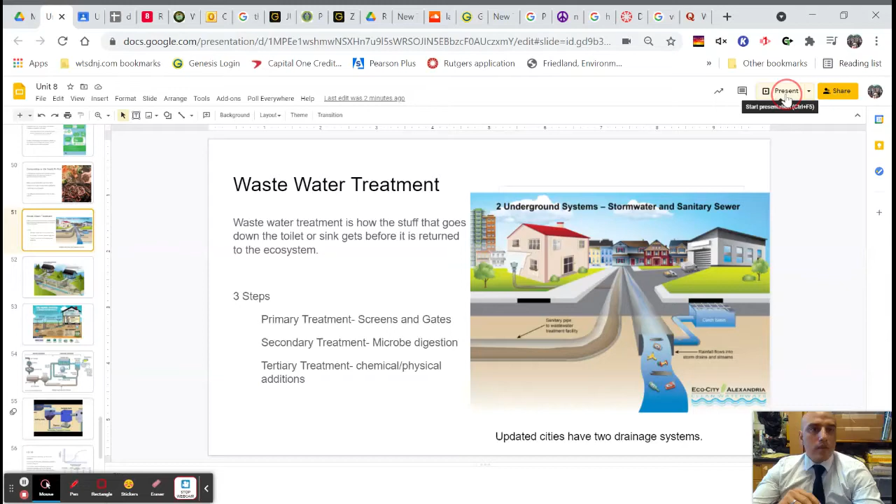Today we're going to learn all about wastewater treatment. Wastewater treatment describes how the water we throw down the toilet or the sink basically gets treated before it's released back into the ecosystem. When you do number one or number two, it is going to be released out into the wild. What happens? How is it treated? That's what we're going to learn today.

But before we even go into that, I want you to know how the sewer system works in a community and typically around different areas.

In cities, developed cities, everybody is connected. Let's look at these homes in this image. There's going to be one main drain that comes out of your house, and the sink, the bathrooms, the toilets all join to one pipe, which feeds into the sewer in front of your house or apartment building. The next house or apartment building also has a main pipe, and all of these feed into the sewer.

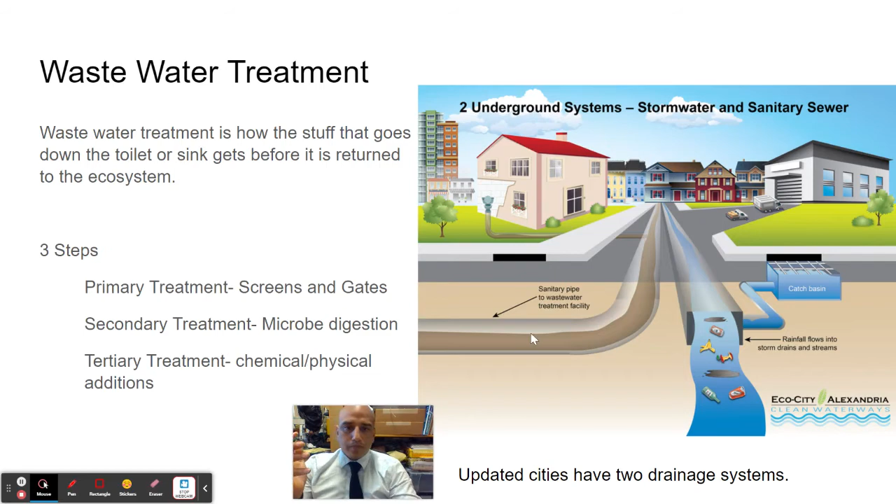Let me go back. I put those two slides in there basically to show you that the houses are connected. Here's the sewer, here's a storm drain.

One time in Jersey City, I'll tell you the story. I don't know, I might have even told you the story before, but I'm going to repeat it.

Imagine there was no other sewage pipe here, rather it was just the one pipe. And I lived on the bottom of a hill. So here is...

I'm young, we didn't have homes growing up, we lived in apartments. So this wasn't something that was taught to me. We did not know. We bought the first house we could afford, so we were able to buy it.

But if I had to do it over again, this is one of those gems I'm giving you. Please pay attention to these. You want to know where the house you're buying is located. Is it at the bottom of a hill?

If it's at the bottom of a hill, then all the rain, all the snow, all the leaves are going to pretty much stay right in front of your house. The topography, the pitch of the ground you live on, does it have great drainage of the street?

Think about that. When people mow their lawns and blow the grass clippings into the street, where do you think they end up? They're going to go downhill. If your house is down there, you might have to deal with that. If you have proper drainage, you'll be okay, but it's just something you have to deal with.

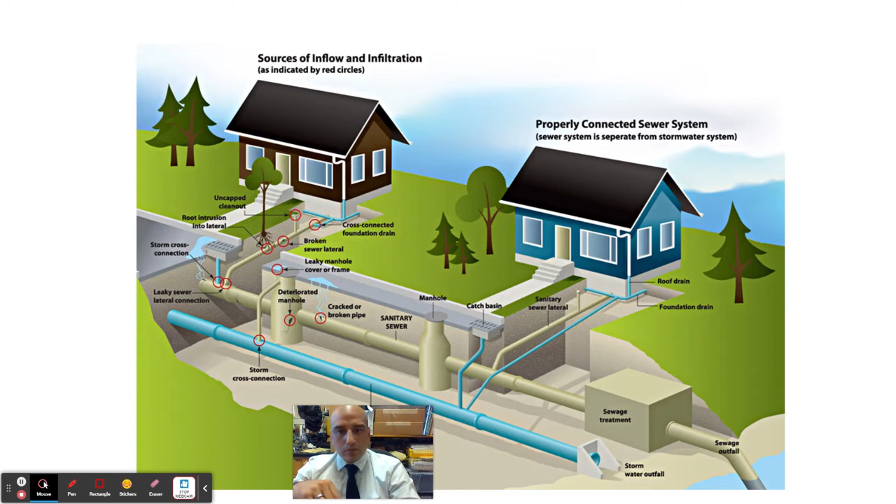Know where you live. Here's another picture — a bathroom upstairs connected to the same drainage pipe. This is that backwater prevention device we did not have in that house at the time. Water can go this way, but it cannot go back up.

Now, important — when you're at your toilet, what do you not want to drop down there? You don't want to drop motor oil, antifreeze, pesticides, or fertilizers in there. They should not go in there. There are microbes back at the wastewater treatment plant that are susceptible — you don't want to kill those. You don't want to kill them because they're doing all the good stuff for us.

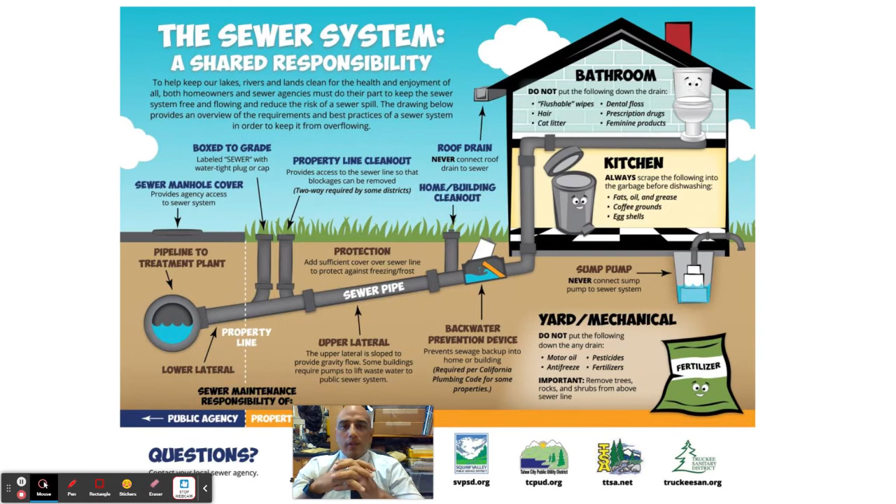The motor oil, or any oil for that matter, is an issue. It floats to the top and clogs machines. We'll show you how we get rid of it in the wastewater treatment plant. Another great picture, just summing it all up.

Now here's where we need to pay attention and be able to draw this. We need to understand how this is working. All the homes are connected to this one huge pipe, probably about 8 feet in diameter. You could walk through it, like where the Teenage Mutant Ninja Turtles are running around with their skateboards. That's the big sewer that comes into the wastewater treatment plant.

The first thing that has to be removed is the larger items. People throw tires down there, sneakers down there, dead bodies down there. Dead bodies get washed up. Sometimes deer get in there. Alligators, I don't know, there could be alligators.

So primary treatment is going to involve bar screens, which are going to basically block things. Just think of it like a big gate, and only smaller objects are able to get through.

They have something called a comminutor. I don't think you have to know that term, but what's happening here is kind of like a blender. The screens prevent the larger objects from getting in, then the rest of the sewage goes down here and gets mixed all up. Heavier things that can break are going to break, like rock, but not really hard rock, and things that go through the gate just get softer. Then, by density, the heavier objects fall down. That's what we call grit.

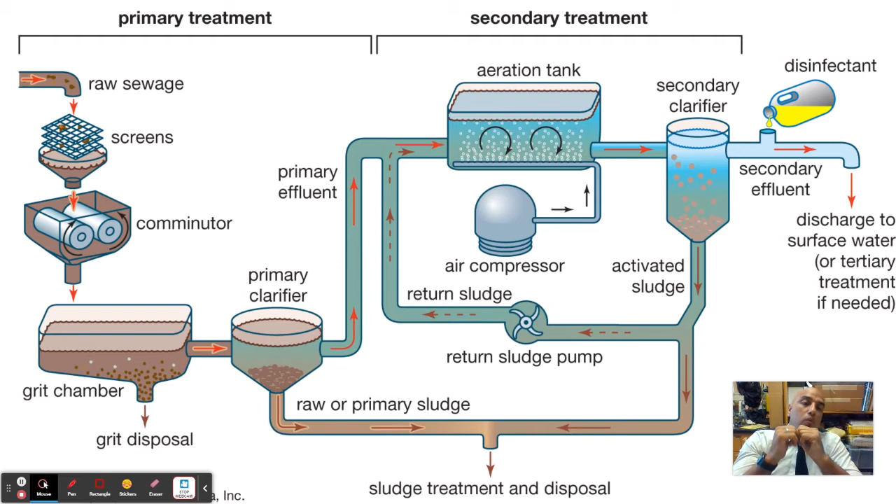That's why we don't have a dead zone here. Do we have a dead zone? No, I go fishing over here. But typically, there's a dead zone in the Gulf of Mexico.

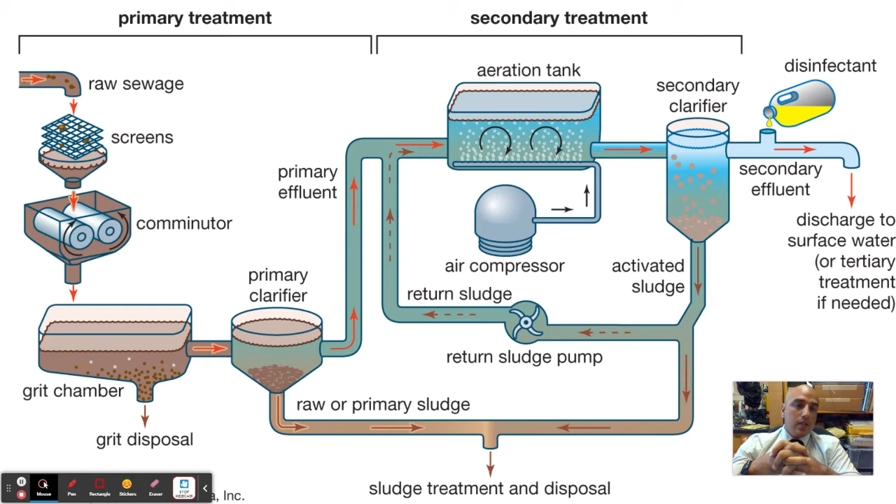Okay, hopefully you understood that. Let me review a couple things: influent, effluent, primary treatment, secondary treatment, and aeration tank. Tertiary treatment is typically chlorination or ultraviolet radiation used to destroy the microbes. Why is that important? You'll see in our next section we have to talk about waterborne disease, and using something like chlorine makes sure we don't have any of that.

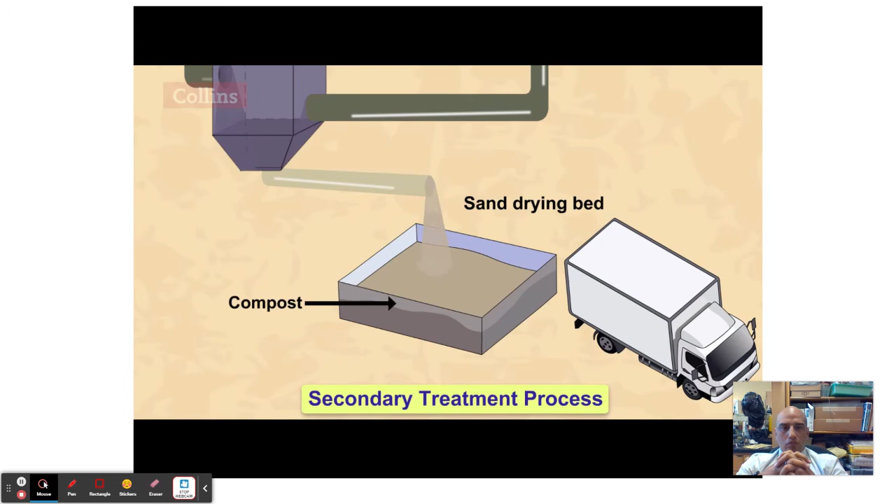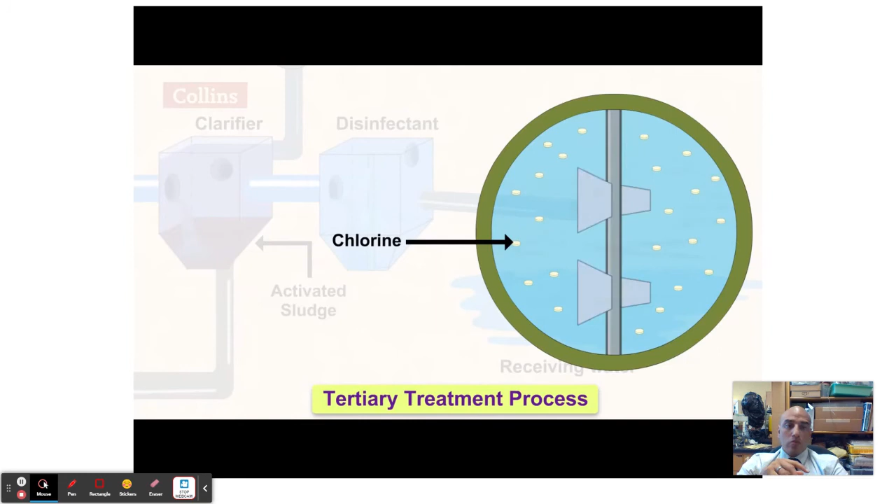I like the video a lot. I think he was a little incorrect about chlorine taking out the nitrogen and phosphorus. That was a misconception; the chlorine does not do that, it kills the bacteria, that's what it's going to be doing. You could double check me if you want.

Now, what was cool? You saw that truck on the bottom. So sludge, the heavy stuff that comes out of the sewage, tons of NPK, could be used as compost. Wait a second, do you want human waste used as compost? You might not. So there are rules regarding whether you could use human waste for particular crops.

I know here in the United States, you cannot use an in-ground crop like potatoes and grow them in human compost. But my neighbor told me to buy this stuff called Milorganite, and I bought it, and I don't know why I bought the fertilizer. Why did I buy it? Because I was planting a tree, and I was wondering where they get this Milorganite, and basically they get it from sewage. So I'm spreading it around, and afterwards I look at it and think, hey, they get it from sewage. But anyhow, the dried out sludge can be used for that. It could also be used to cover landfills, like we discussed before.